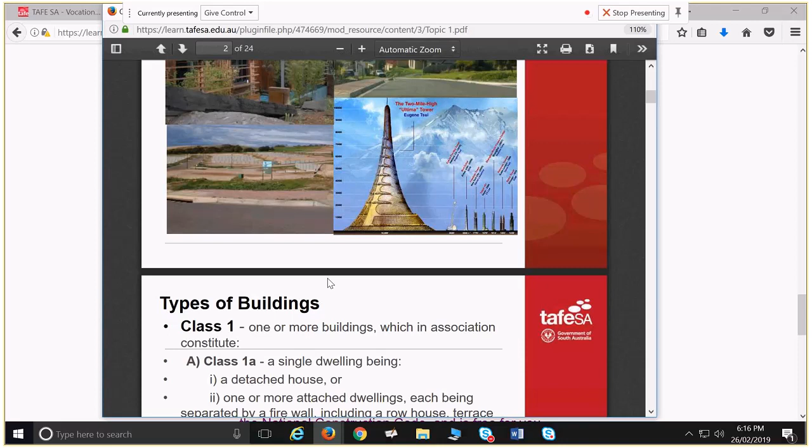So the National Construction Code, there are 3 volumes to it. There's Volume 1, Volume 2, and Volume 3. What we are concerned with in this class is Volume 1 and Volume 2. Volume 3 is for plumbing and electrical, or building services.

And then there's also a Volume 4, which is an explanatory volume. You can have a look at that. It provides commentary on the National Construction Code in, I guess, essentially an easier to read fashion. But our main reference is going to be Volume 1 and Volume 2.

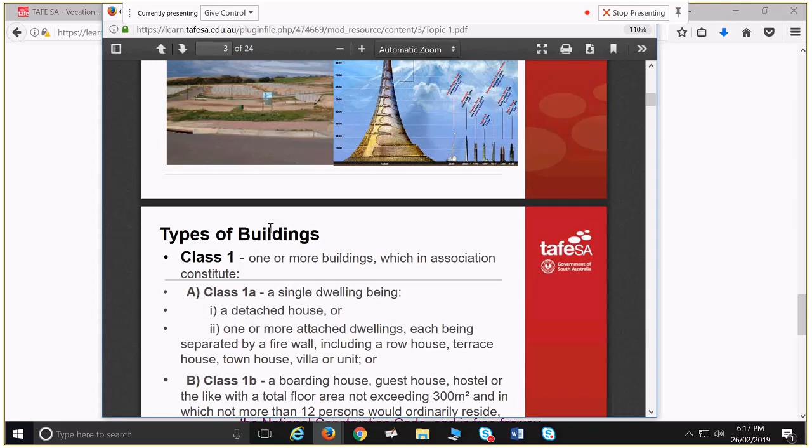Those 2 volumes, within the National Construction Code, classify buildings into different classifications. So you have Class 1 buildings, which are your residential buildings, so a single dwelling being a detached house, or one or more attached dwellings, each being separated by a firewall.

So I think we digressed a little bit last week into what is a firewall. That fire separation wall is a wall that will maintain fire separation for 90 minutes in the case of a Class 1 building. So it won't fall down for 90 minutes, it won't let the passage of flame and hot gas through it for 90 minutes, it won't heat up on the other side for 90 minutes.

So if we have, maybe let's say these are a series of row houses, between those series of row houses, if we had a fire separation wall, they become a Class 1 building. And then we can get separate title and sell those off separately, if the council allows for the creation and subdivision of separate titles, etc.

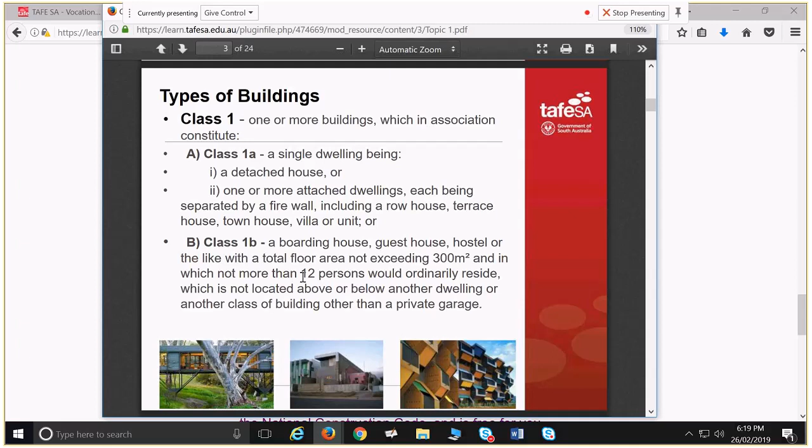So that's Class 1A. You also have Class 1B, which is a boarding house, a small boarding house, with a maximum area of 300 square metres, where no more than 12 people would normally reside. So they both come under Class 1.

Class 1, and then you've got class 10, which are non-habitable buildings or structures, things such as private garage, carport, shed, or the like. Typically, class 1 and class 10 buildings are built together. You build a house, you may build a garage on the site, or a studio, or a swimming pool, or a retaining wall, or a non-habitable structure.

Because these two things are normally built together, they are bundled together in the Volume 2 National Construction Code. So I'll write that on the board as well to keep it clear. So we've got Volume 1 and then Volume 2. Under Volume 2 we've got Class 1 and 10. Under Volume 1 of the NCC, we've got Class 2, 3, 4, 5, 6, 7, 8, and 9.

So Volume 1 covers commercial. These are commercial classifications. Volume 2 covers predominantly residential classifications. So Class 1 and Class 10.

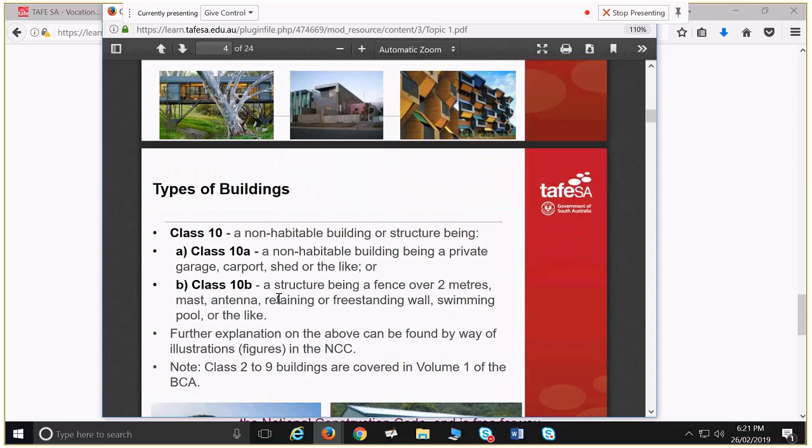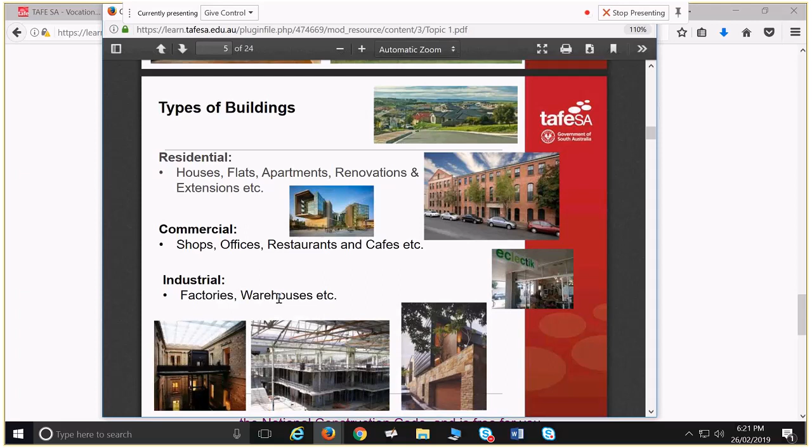So class 1, houses, townhouses. Class 2, well, that says flats. That I'm not sure if that says flats now in the new National Construction Code. That's a bit of a definitional thing.

Typically, when people refer to a block of flats, they're referring to buildings that don't have fire separating walls and don't have separate titles. When you create fire separating walls and separate titles, you can then call them units and apartments, because they can be sold off separately.

So that's just a little definitional thing. But class 2, basically that's multi-residential, where you've got a whole bunch of residences all joined together within the one building. And an important part of that definition is you have residences on top of other residences. So that means it's not only about fire separation walls, but fire compartmentalisation with your ceilings as well. So that ceiling has to reach 90, 90, 90, or in some cases, when it's a larger development, it's 180, 180, 180 - for 180 minutes, resist the passage of fire in certain tests.

And I mentioned boarding houses coming under class 1 for 12 occupants or less. If we've got more than 12 occupants, then we have to go into this classification, which is class 3, which also includes hotels, motels, etc. So your larger accommodation where you've got people that don't necessarily know each other.

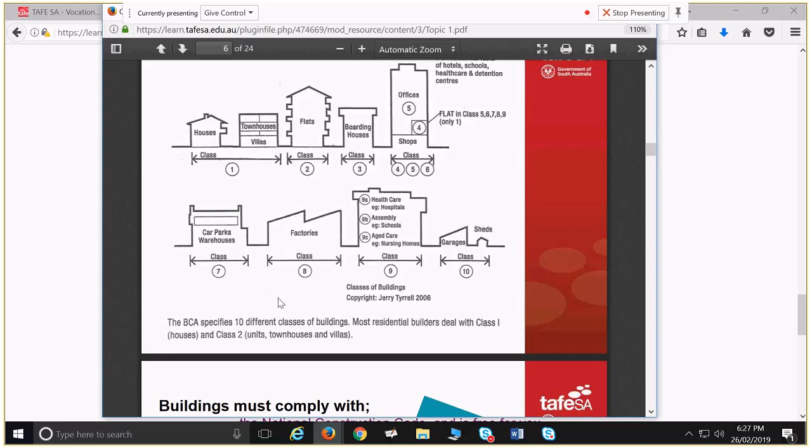So all the buildings, the council has a say in what we can do and what we can build. First of all, we have acts of parliament. So it's not just the federal government. In Australia we have several tiers of government. We've got federal government, which is all of Australia. We have state government, which is all your various different states, and then we have local government.

Within South Australia, so we've got our South Australian government. They will pass various different acts, and some of those acts relate to what we do as a profession. One of them is the Building Work Contractors Act, which tells you how you can operate as a building work contractor, etc. The other one is the Planning Act. So that Planning Act sets out the parameters in which local councils can impose a zoning, and they can impose that zoning on various different parcels of land to say you can do this or you can do that on this parcel of land.

And they do that via their development plans. So each separate council has a separate development plan. There's a lot of commonality between the development plans. Like if I pick up the development plan for Charles Sturt and the development plan for Mitcham, probably a lot of the stuff is the same, except for some of the different councils will have specific aspects that relate only to them. Like Adelaide Hills Council, they worry about contamination of water sources that come down through the hills. They worry about bushfire. They worry about houses that can be seen from the Adelaide Plain that are sticking out from the hill, etc.

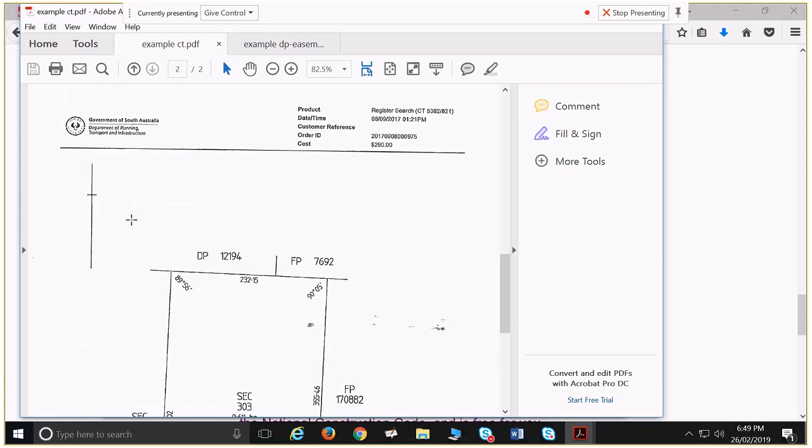So we've got all the information on that first page of the certificate of title. It tells us who owns it, who has interest in it, what parcel of land it is, etc. Then on the second page of your title, you typically have your survey plan image.

Just like when we provide information to the council about what we want to build, we'll provide them with plans - these are the floor plans, these are the elevations, etc - and then we'll also have a document, the specification, where it's all written. Same as with the title, you've got written information, and then you've got diagrammatic information, because there's some information that you can convey so much better in diagrammatic form than in written form, and that is things like property boundaries.

So we can say that angle there is 89 degrees and 56 minutes, that one there is 90 degrees and 5 minutes, and the distance between them is 232 metres, 150 millimetres. So that sets out exactly where the boundaries are.

So the surveyor can get that, look at it and go, okay, well, we're going to do our survey from this registered survey point up there, get the location of that little piece, that little corner there, and then they work out exactly where everything else is in relation to that. So that can be read by the surveyor.

But also, as a drafter, when you have to go drawing up a site plan, that's where you get your site plan from. So you get that, scale it up in AutoCAD or Revit, import it, scale it up, and then just draw directly off of it. Or you can go, all right, start here and draw 452 metres and 20 millimetres up that way, and then draw a line 89 degrees 56 minutes from there, and so you can draw your site plan accurately from that information.

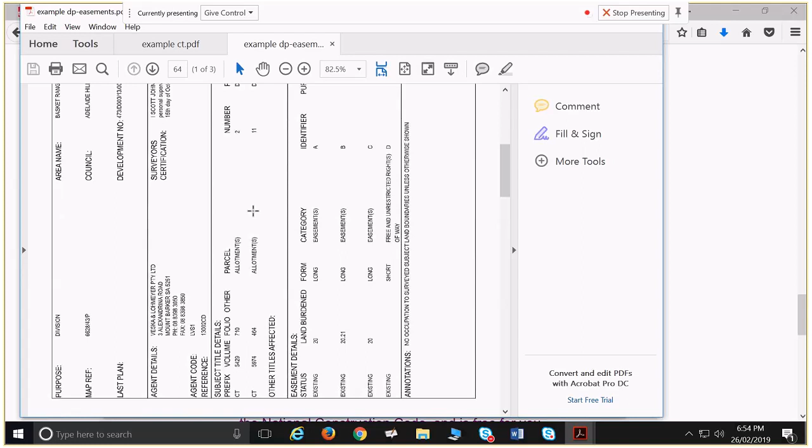So typically, you have a survey plan image to show the location of all of these things. You have a document which summarises them, and then you have further documents attached specific to each one of those, saying this is the person who owns that easement. So you have something like a survey plan image, like that larger one, and then a more detailed survey plan image that shows things in even more detail.

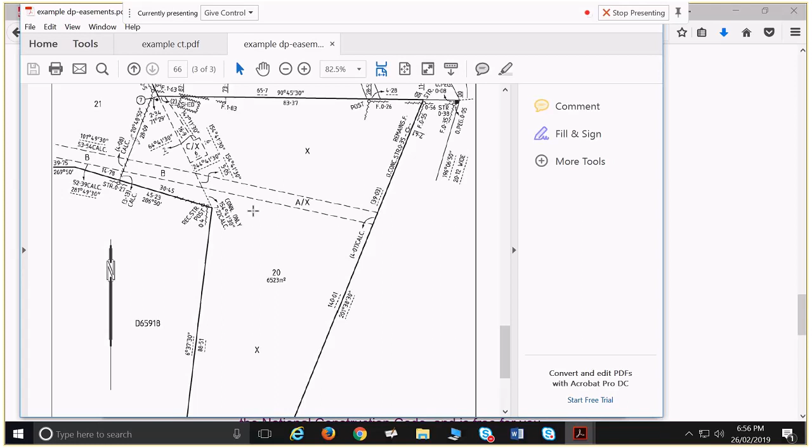They also show things like this - a bit of corrugated iron. It says that shed is actually encroaching on that other property. So some things got a little bit out of whack at some point in time when they were doing fences and sheds and whatnot. So there's all that information shown in detail, and then we've also got our detailed directions - all of our angles for the allotment there, like that. So that's one that's a bit messy. You won't often see them that messy.

So if there's a building that's built wrong, I understand this has happened in America before. Not this building, but yeah - a building which is built on someone else's boundaries, and then they charge you rent for that.

Oh, I don't know actually, I don't know any cases of people charging rent for it. Typically, what happens is there's a realignment of boundaries, and you have to pay for a surveyor to come out and do the survey for the realignment. That might cost you about $5,000 to do it. It's not a cheap exercise when it comes to something that might go to court, because surveyors go, all right, we can go out and do our job, but if we have to stand up in court to defend that, we want to be paid more.

So for significant disputes, it will typically be a realignment of boundaries, and this will get changed, and you may even have a new title issued. So rather than have your old title reference, you get a new title issued that shows this boundary cutting across here to enable that house which was built on the wrong bit - that realignment of boundaries.

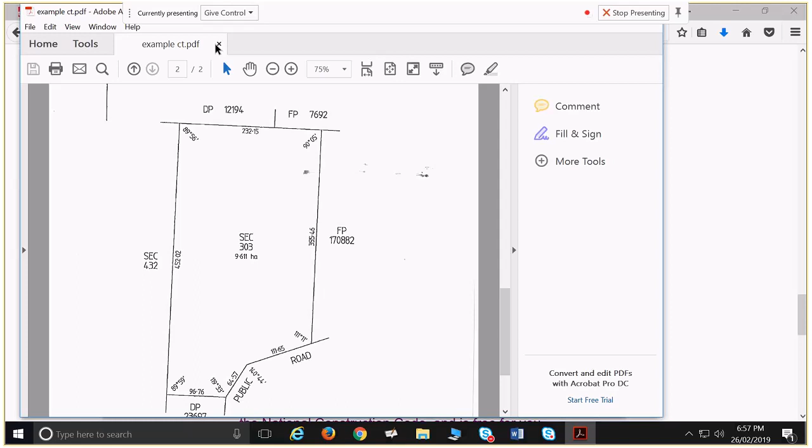With that other one we just saw, where there was a shed encroaching on that block, typically you wouldn't worry about it, but it costs you less than $5,000 to build a new shed. Just knock the old one down, build a new one if the neighbours have an issue with it. So it comes down to that negotiation with neighbours and often a realignment of boundaries.

So we've covered the National Construction Code. Previously it was called the BCA, so if you hear people talking about the BCA, that's what they're talking about. BCA and National Construction Code are not the same - BCA was what came before it. BCA was still a national document, but then you had different state-based housing codes, like the South Australian Housing Code. That was all later incorporated into the National Construction Code.

But having said that, there are still state-based things, and I'll get into that in a minute.

So the Development Act is an Act of Parliament that spawns the development regulations. I think it's the Development Act of 1996, which brought about the development regulations of 1998 or so. Those are the current development regulations by which we have to do anything.

They give council the authority to impose their zoning and require that you get council approval to do anything. That is all about to change. We've got a new Development Act, the 2016 Development Act, which is in the process of forming new development regulations, intended to be implemented in 2020 - that's next year. I don't know much about the changes within that, but I do have an idea, as do others.

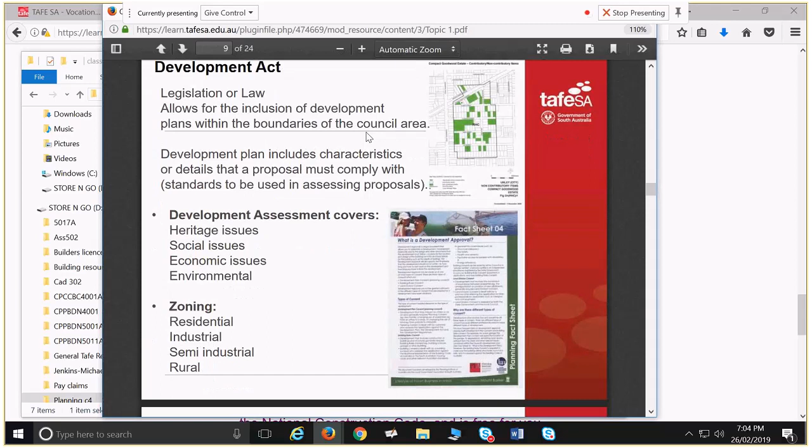So National Construction Code deals with things such as structural sufficiency—is it going to stand up? Fire safety—if there's a fire, is everybody going to get out okay? Health and amenity—if we're living in that building, is that going to be detrimental to our health?

Ways in which buildings can be detrimental to our health include mould growth from condensation, and inadequate light and ventilation, which also causes mould growth, but also it won't be a very nice place to live. That's about it—that's controlled by the NCC.

Access and egress—that's things like stairs. You can't build a staircase which is this steep. You can build a ladder which is that steep, which is a way of getting around some of these things, but for staircases there are rules around that. There's minimum widths of doors for required exits in emergency situations.

Let's say we had a fire at the TAFE here, we wouldn't want to have to be going down a really tiny corridor trying to squeeze everybody down there. It would be disastrous. So there's some dimensional things around access and egress, and energy efficiency, which is to ensure that buildings are not built which just use lots of energy.

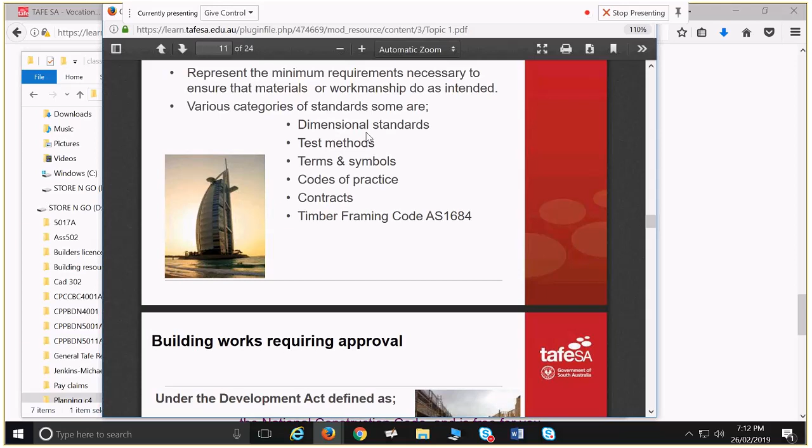We've also got, say, an Australian standard for carpet, saying carpet has to be a certain way. Or Australian standards for paints and internal finishes, for the manufacture of plasterboard, and for glass, AS 1288, which says how a piece of glass has to be manufactured and what defects it can or can't include.

Whenever we do anything, typically we need approval. Some building activities are exempt, as the development regulations set out buildings of a certain size or nature, under a particular value, that don't need approval. Then your individual councils can say, this one does need approval — so what the council says goes on top of the development regulations.

You can debate that with councils, but typically a small garden shed won't need development approval. New construction of a house, demolition or removal requires approval. Excavation or filling incidental to construction or demolition also requires approval.

If we're just digging a small hole, that's not going to require approval. A lot of councils have information sheets saying what doesn't require approval in their area — for example, removal of 8 cubic metres of soil won't require approval, or some similar volume. But typically, if you're digging a big hole, council wants to know about it.

Or if you're cutting a road in and will have runoff from that, or cutting a road in from a road reserve onto your property, council definitely wants to know about that, and you shouldn't do it without council approval.

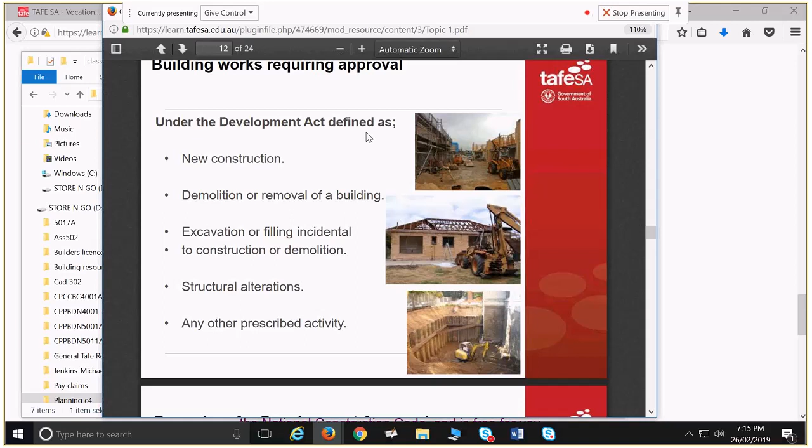So for many instances, it pays to follow the letter of the law. And then in the development regulations, they've got this funny bit that says any other prescribed activity, just to cover all bases, to make sure council can tell you what to do about what they call any other prescribed activity.

So for development approval, you lodge an application to council. The approval consists of planning consent and building rules consent. Planning consent goes to the council currently. Building rules consent can go through the council or through your private certifier, whichever you choose.

Planning consent is assessed against the development plan, so your zoning and what it says in there. The development plan consists of council-wide objectives. So let's say Marion Council will say we are a flat piece of land with some shops and things like that. They'll have a general picture for the council and say we want residential development to be this, we want industrial to be this, etc.

So you have council-wide objectives and then you have your zone-specific objectives. So you have residential zones, and then you have residential 1A, for example, which will say residential 1A will allow detached dwellings with an allotment frontage of no less than 10 metres, things like that.

Or then they might change the zoning. So you might have been residential 2, which says you have to have an allotment frontage of no less than 30 metres. Then they change your zoning to residential 1A, which says you can have an allotment frontage of 10 metres. And then all of a sudden developers come in, buying up everything around the place, knocking everything down and chopping it up into 10 metre frontage houses.

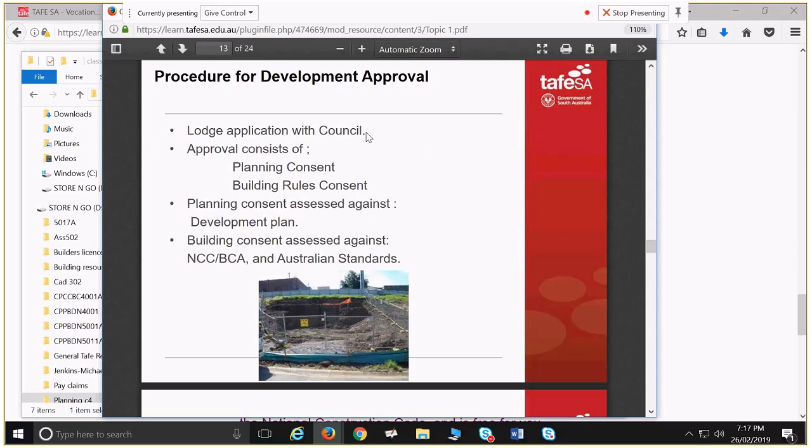And then that's your planning consent, and then your building consent is assessed against the National Construction Code and Australian standards.

For getting any of that approval, you have to supply documentation. So you supply plans and specifications to the council. And that's what you guys are pretty much, I think, here for, is learning how to do all of that - get that stuff packaged to council to get it through.

That's going to be the bulk of your work as drafters, and particularly this bit is going to be the bulk of your work as drafters - producing those plans that have all the information on it to say this is how the building is going to be built, and this is why it complies with all the Australian standards and National Construction Code.

But with your plans, you also supply a specification. So you have diagrammatic representation of the building, and then you have written representation of the building. The reason we have written representation as well is because on our floor plans, we don't want to say carpet, plush pile, grey colour with a mottled pattern, eggshell white walls, matte finish, Dulux, blah, blah, blah. We want all of that stuff separate, because if we include all that information on our plans they'll just be covered with text, and it'll be very difficult to read.

So some things you do need to show on plans. All the distances, everything that's essentially measurable is really good to show on a plan. So how large the door is, how large the windows are, how high the ceiling is - well, that's drawn in the section. But everything that's happening in a horizontal sense is drawn on a plan. Everything that's happening in a vertical sense is shown in either an elevation or a section.

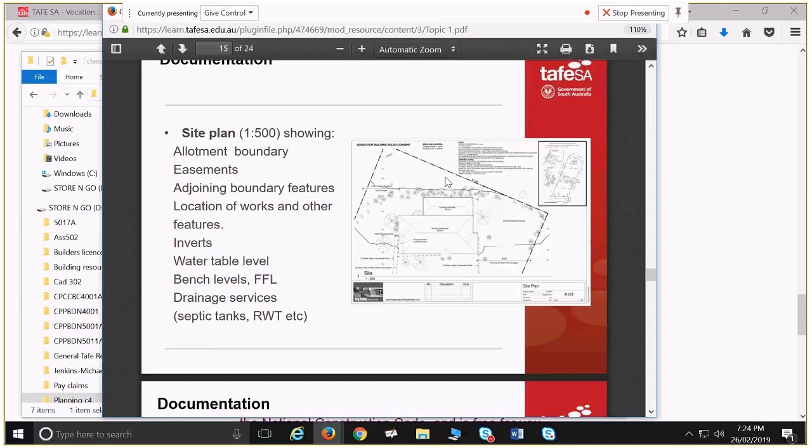So site plans - all this stuff you're going to be hopefully incredibly familiar with in a year or so. For planning approval, you need to put in a site plan, probably a locality plan, floor plan, and elevations as a minimum. They might ask for other things as well, like if you're doing stuff in prominent locations. They did something on Melbourne Street where they wanted a mocked-up visual of exactly what it would look like in that location. It really all depends on the area you're working in.

But yeah, that site plan's got to show things like easements, so they want to know where a power line is going through, because if you don't show easements on there, the council might check the title.

That's another thing you include with your application. Council might check the title, but if you don't draw on your site plan where an easement is, they don't necessarily know that you're building on that easement. Certainly SA Power Networks have no idea because nobody sent them anything. So you need to include all your easements on your site plan.

You need to show adjoining boundary features. So if you've got a neighbouring building built right on the boundary, council wants to know about that - one, for fire separation. You don't want to be within 900 millimetres of that, or if you are, you need non-combustible materials or that sort of thing.

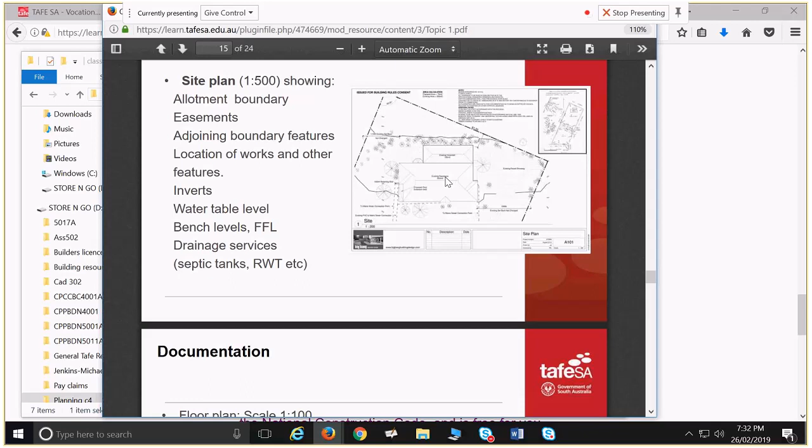But quite often what ends up happening is people build a detention and retention tank. Retention is water you retain for your own use, and detention is water you detain for a certain period of time, a couple of hours. So it's a tank with an outlet - this tiny one has a big outlet for use around the garden, that bit stays full all the time. In a rainfall event, this other bit fills up and trickles out slowly. Councils are stipulating that in certain areas as well.

So that's site plans and floor plans. A site plan is going to be either 1:500 for large blocks or 1:200 for smaller blocks. Floor plans are typically going to be a scale of 1:100. What we definitely don't do is just make up our own scales - we don't go 'oh well, 1:333 fits really nicely on the page.' The reason we don't do that is because sometimes builders, council inspectors or somebody has to scale off the plans using a scale rule for various different things.

Also, people get used to scales, used to plans in a certain scale. So you look at it and go, oh yeah, that's a 2100 high window, 1800 wide - in 1:100 you end up being able to just tell what that is. If we make up scales like 1:250, you can still scale it off because it's easy maths, but it's harder to just look at it and know. So we have standardised scales, and councils say that on their websites - they want locality plans at 1:500 or 1:200, floor plans at 1:100 or 1:50, sections at 1:50, details at 1:20, 1:10, 1:5. They stipulate that on their websites.

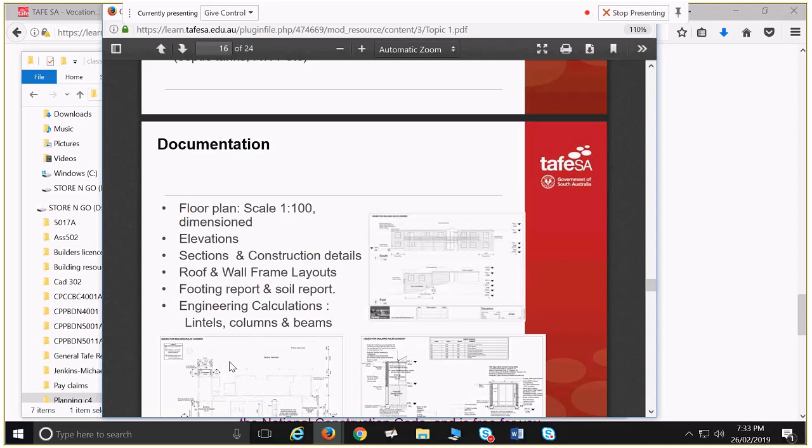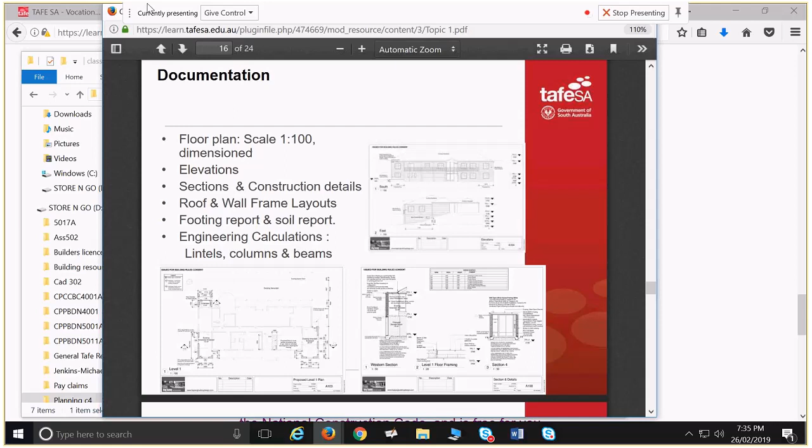Floor plans are drawn as if you're chopping through the building at 1 metre height from the ground and looking down on it, so anything within that 1 metre you show on your floor plan. Sections are as if you're slicing through the building in a sideways fashion. And specification is all your detailed stuff like carpets, floor finishes, things like that.

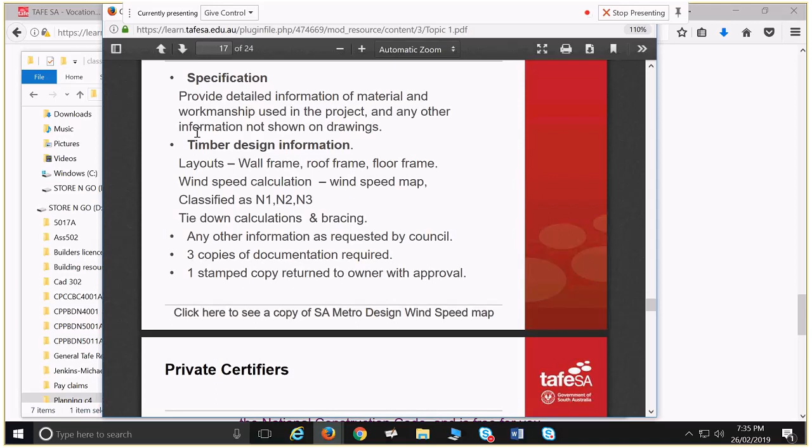So private certifiers - we talked about private certifiers before. After you've got approval and start works, you still have to notify council along the way; the involvement doesn't stop at that point. They want to know when you're going to start digging, and they want to know before you pour concrete in your footings.

So you dig holes, put in a plastic membrane to stop moisture coming through, and then put steel inside. The size and spacing of that steel determines how strong the slab is. Council wants to see that you've put the right steel in there, and the engineer wants to see it too, before you cover it with concrete - because once it's covered, nobody knows what's in there. They'll also have to be notified at roof framing stage. Do they actually have to come out to site, or can you just take pictures?

All you have to do is notify them. Give them one day's notice to say we've got stuff in place, at 7 o'clock tomorrow or the next day, whatever, we'll be pouring concrete. It's up to you to come out. That's all you have to do, is notify them, and it's up to them.

Look, it really doesn't happen a lot that council comes out. Sad fact. That might change after things like Opal Tower in Sydney, where so much stuff was done with little regard to actual correct practices. Things like that might change a bit, and people from council might start visiting sites again.

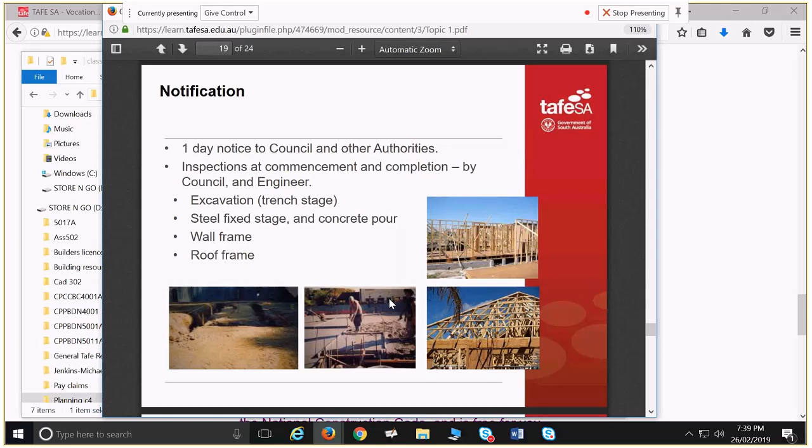Did they have any cases where the steel's too far out and then rusts? Well, it's only about 4 or 5 months old, this building, so it's not rusting yet. A really interesting thing — if you look at the floors through here, there were some sections that were cast too high, so they cut them down, and you can see the steel work just under the surface if you look. But that is a major issue, because for steel work you need 25 millimeters minimum coverage internally, and for anything external, 40 millimeters minimum coverage. If you don't have that, as you were saying, it rusts, and when it rusts, it pops the concrete away from it — you no longer have that bond between steel and concrete.

If council members come out and they see a lot of dirt on the road, do they get gripey about that, like where cars drive through and traipse mud? Because I actually had an issue with that.

Yeah, so it's the EPA that worry about that, but council will do the EPA's work for them, for sure, because the EPA can't be everywhere — they're not going to be scooting around checking everything. They want to ensure that you have dust and sediment control in place. Dust control is about having shade cloth on your fence around the site to stop dust blowing out. Sediment control is about ensuring you don't get four-wheel drives taking lots of mud out onto the road, or if you do, that you have little bunds placed around the culverts, or where the water goes into the drains, to catch all of that sediment.

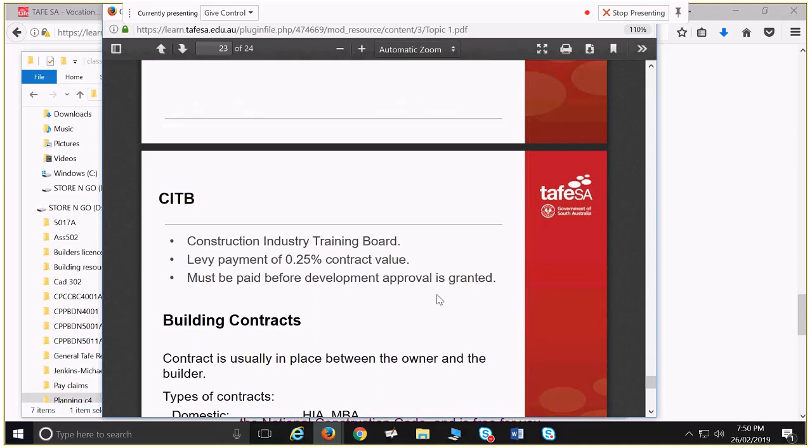And if you're contracting for doing that, you're not going to write up your own contract, you shouldn't. You're not going to make these things up. You typically get a standard form contract from HIA or Master Builders. So a lot of builders are members of either or both, because there's a lot of other services they provide, but one of the services they provide are standard form contracts, which will include everything that you want to be contracting for.

If you're doing commercial work, you're going to have somebody draft a commercial contract or use a pro forma and modify that, because within commercial work there's a whole lot more variation. For residential, we can say this is what they're going to be doing, within the bounds of that. When you get into commercial, it's far more each to their own scenario. So that's the legislation and so on that controls what we do on a site.

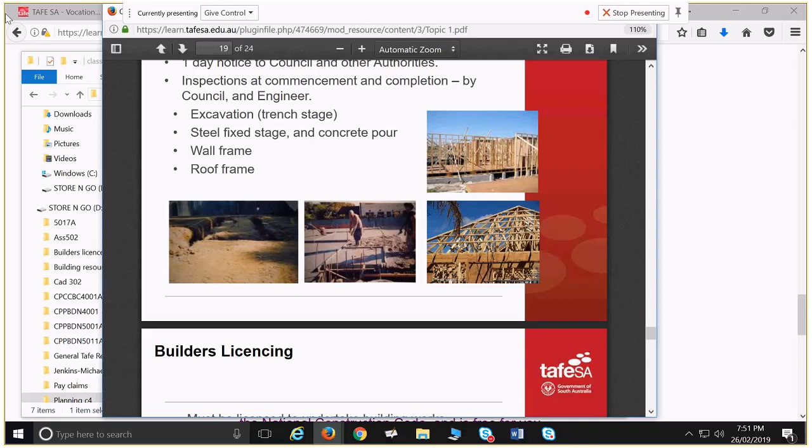It's not just the legislation, it's all those people and bodies that will control what we do on a site.

The next thing for you to consider is what drives the design. There's one for you, Toby - it's House Over a Creek. I reckon that's Max - that was Max Pritchard, the architect for that. So does everybody know Max Pritchard, or know of him?

I feel like I've heard the last name. Max is retired now - there's Pritchard Gunner, so you'll see Pritchard Gunner Architects, and then Pritchard Building something or other, that's his son who's taken that over. But Max is the father. He's done so much around SA. I used to go installing water tanks and so on, and I'd just be rocking up at Max Pritchard places all the time. He's very prolific, but also very successful - he would get a lot of stuff through council.

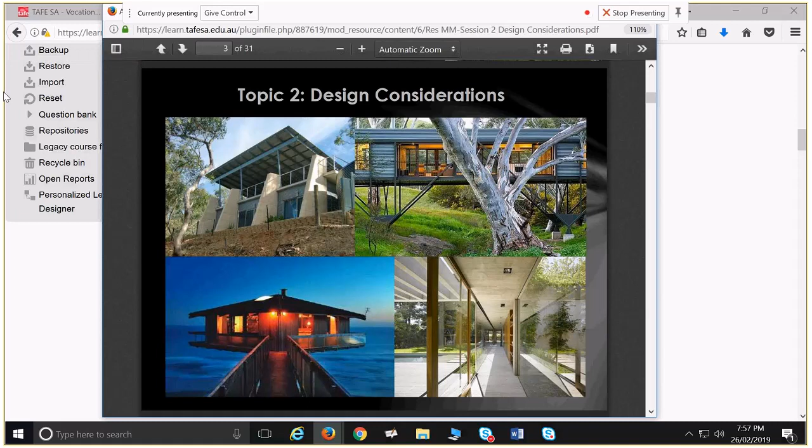So as a draft, obviously the architect would come up with the overall shell of what the building should look like, but then does that fall onto us to say, alright, well, this is a house in the Adelaide Hills where there's gum trees all around, then we need to use that sort of product that has this colour to it, so it doesn't look odd. Is that where we make that decision, or is that all the architect?

It really depends on who you're working for. So if you're working in a large firm, you typically get pigeonholed into being a CAD monkey, where you're just doing drawings, and you might just draw up sections. You might be the person doing plans and elevations, and then someone else is doing structural modifications and so on. So for big firms, you get pigeonholed a little bit more.

If you're working for a very small firm, for a single architect, they'll go, oh okay, Toby knows a bit about this sort of stuff, I'll get him to do that. But then as your experience and knowledge grows, they go, well, I'm charging out at $200 an hour as an architect, we're charging him out at $80 an hour, let's give him lots of work.

But then also you're in that position of going, well, I know this stuff, but how about I charge you $120? So you increase your value as a drafter by knowing more, and so you both become far more employable, or you have that negotiating power to negotiate a higher rate if you know a lot more. It's a very difficult thing to answer because it's always very case specific.

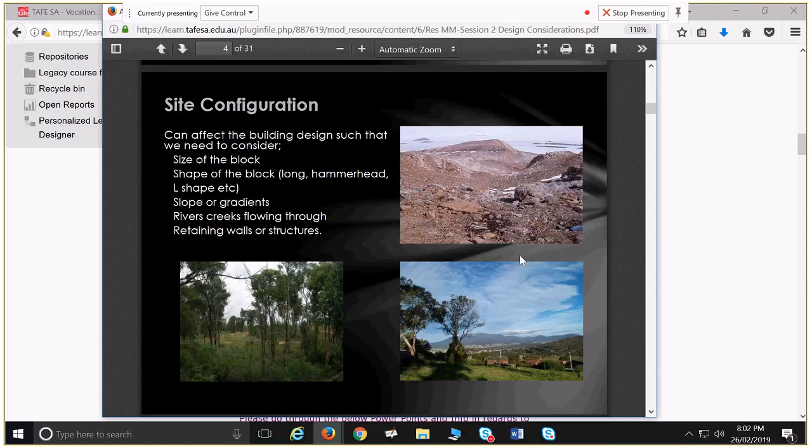You might think, do you want to consider purchasing another allotment to build on? It's like an extinct volcano. Do we have seismic activity? Do we have to design for seismic activity?

Site configuration, the shape of the site, is going to dictate what you do. Access, things like that. So if this is your access, you probably don't want to build in precast concrete panels, because how are you going to get them in there, for starters? So access will mean anything.

Things like that have to be considered. In fact, that's probably the most important thing that drives it, is what's it going to cost to do that.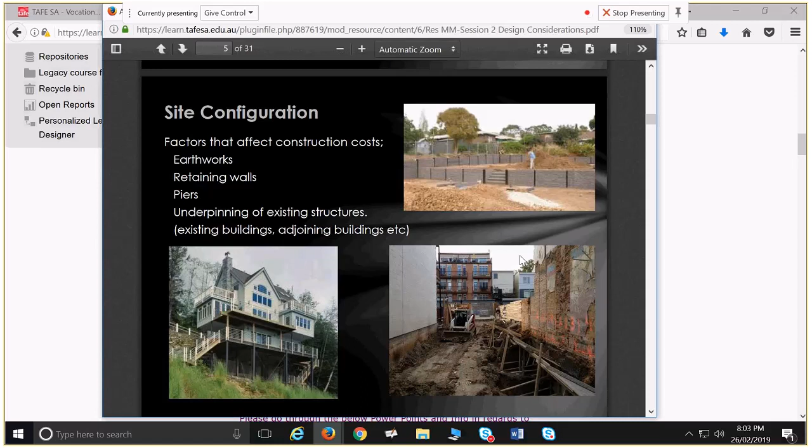Very important, avoid building on the wrong lot. It happens. In fact, it almost happened to me. A place over in Kangaroo Island, bush block, all these bush blocks, no pegs about the place, measured from - initially I got it wrong. I started doing a level survey and it's like, oh no, this is not the right one. So it can be easier than you think to do that.

We know about certificates of title, lot numbers, and so on. So we check all of that. We understand all of that. That's like our checklist. What we didn't mention before are liens.

If there's a financial debt against the property, has there? And that's an important thing, because let's say a child wants to hurry up and get their inheritance before they're actually due. Like, somebody else still owns the property, but that child is saying, oh well, I want grandma's house and we've got to be doing these extensions. They employ you, and you'll want to check the certificate of title and go, hang on, this says Mavis Briggs on here. You're not Mavis Briggs.

You want to check those things, or check that if you're a builder and you've done some building work on a property and that person decides not to pay you, you can lodge a caveat on that certificate of title to stop them selling that piece of land. But also, if that person has employed builders previously and didn't pay them, that caveat's there, and they'll go, oh yeah, can you go do this design work for me? You check the certificate of title, there's an undischarged caveat on there because they haven't paid somebody else. You don't want to touch it with a 10-foot pole.

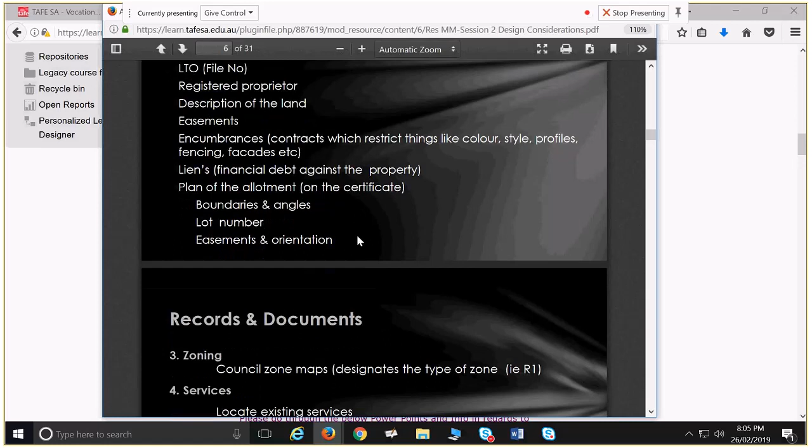Zoning, we know. Services, very important thing. Mentioned before, building next to a creek - you have to meet the SA Health guidelines for on-site wastewater disposal. If you've got a sewer connection, well then you don't. Your sewer connection is SA Water's responsibility. As long as you get it to the sewer, that's fine. You don't need to have a septic system on your site.

Services that are available are going to dictate things. If you've got mains gas, well then you might have instant gas hot water service. If you don't have mains gas, you probably won't have instant gas hot water service or gas cooktop or something like that. Underground power, definitely that's important. So we're working through that at the moment, which is an interesting scenario.

The Murray River, there's a floodline - the 1956 flood level. That's a really good one to bring up. Typically you're not allowed to build anything underneath the 1956 flood level, because that's set as the maximum that has ever been recorded as the height of the flood, and they want to ensure that people don't have their septic tanks down below that, or anything else. So if you have a flood again, fridges and whatever aren't going down the river. That's a really good one.

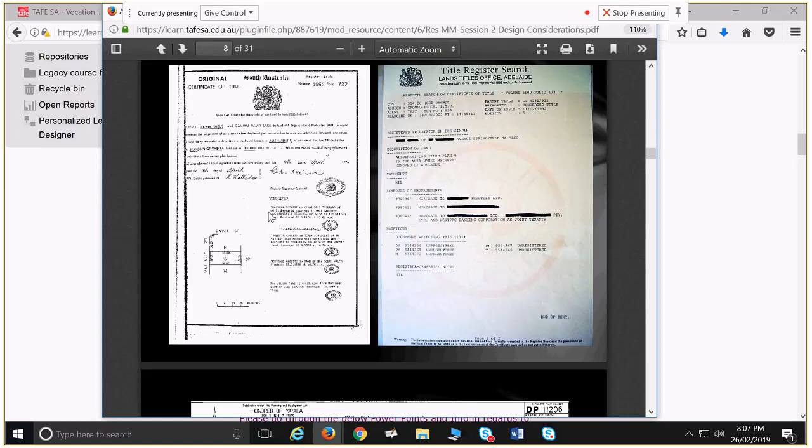So you've got your titles, you're fairly well versed in that. Okay, that's a survey plan image. So that's a detailed development. That's actually probably a bit more of a common sort of survey plan image you get, something like that. And then you get your detailed allotment image like that.

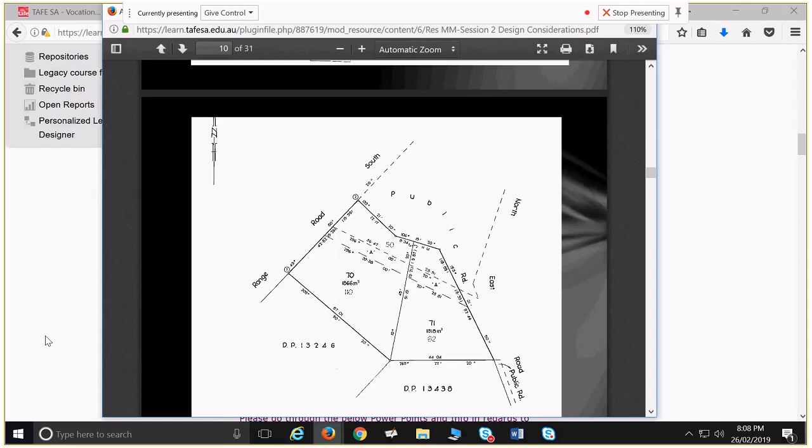So there we go, what's that? It's a road. Well actually, no, that one's an easement. That one specifically, that's an easement for water. So that's up at Houghton. You've got North East Road hitting Range Road South. Up at Houghton there, you've got this massive big concrete water tank on top of the hill and a big pipeline going down from it. So that's what that one's specifically for. But yeah, first glance you'd go, oh, that's an easement for power. It's 6 metres wide or so in a straight direction. It's actually 5.26 metres wide. So yeah, but it's an easement.

So some more survey plan images.

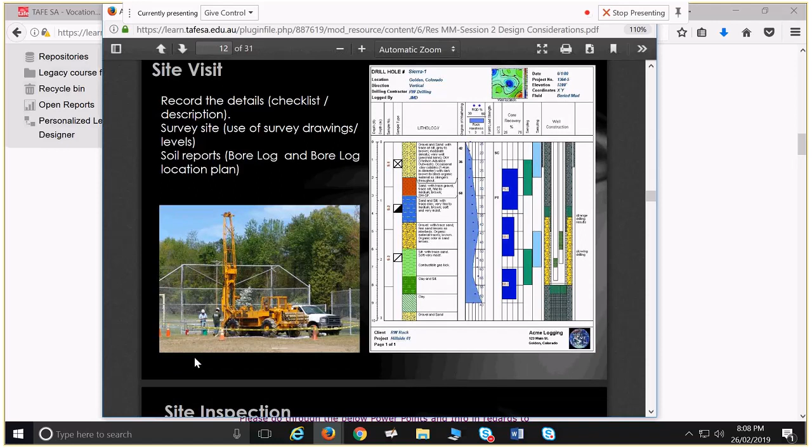Now, another thing that's going to dictate what you can do on a site is what the soil is like. In South Australia we have different types of soils. Predominantly we have reactive soils - soils that if you add moisture, the soil swells. Clay soils, particularly firm clay soils, when you add moisture to them, they have a lot of strength for lifting stuff. There's that capillary action of the water mixing with the clay. It's actually quite a strong action, and it can lift things up.

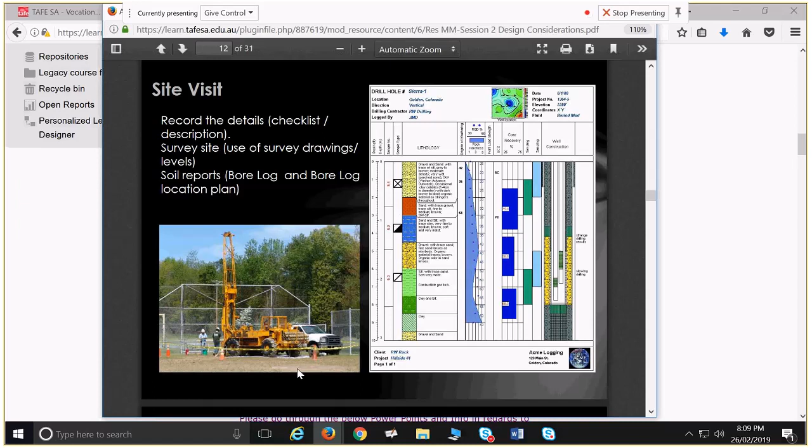Those reactive soils cause a lot of issues. The really bad reactive soils we get are typically around Keswick, Newton, and Rostrevor. So former market garden areas - great stuff for growing things in, but really bad for building. You get massive movements of soil.

I've done a lot of level surveys around houses to work out which bits are being lifted up and why. I think the worst one I've seen is 150 millimetres difference from one side to the other - from this corner to that corner, 2 bricks worth picked up by the soil, but there wasn't much cracking in that house. And yet I've seen others where we've got as little as 50 millimetres of movement - and 50 millimetres is still a lot, right? But severe cracking as a result of that 50 millimetres of movement. The difference is...

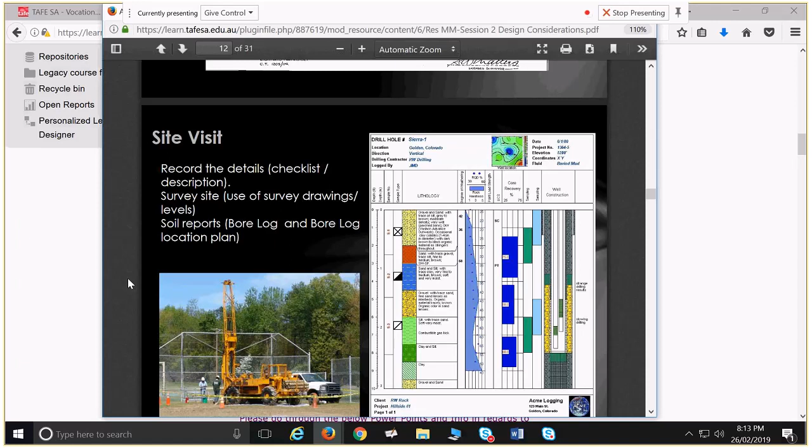Typically it's done with a not such a hardcore machine, just like a Land Cruiser ute with a little push drill on the back. You'll take those soil samples down to approximately 3 metres. The Australian standard sets out that you have to go to a minimum of 3 metres deep, though plenty of engineers like the soil samples to go to 4 metres deep.

In South Australia we have deep-seated reactive soils, which means that some reactivity can be happening even down as far as 4 metres or so.

So you get those soil samples taken, you get an idea of what that soil is, and an engineer does the bore logs. To do those bore logs, they look at those soil samples, take out a piece of it, crush it all up, and go, is it friable, is it prismatic, does it react to moisture, etc. They'll then provide an estimate of how much expansion and contraction that soil will undergo in normal conditions.

So you get an idea of the soil, because that's going to tell you how you can build. Or it's going to tell you how much it's going to cost you to build as well.

Yeah, one fellow I know spent an extra $50,000. Typically your building contract has a $10,000 allowance for footings. He had a $50,000 variation for his footings, so probably $60,000 or so just to build the slab, because there wasn't that consideration at the design stage to go, okay, building on a reactive site, we want something square, something simple, without lots of corners. As soon as you build lots of corners, you've got lots of points for cracking, and you have to go crazy with your footings. The lack of consideration at that early point costs you $50,000, $60,000 further on.

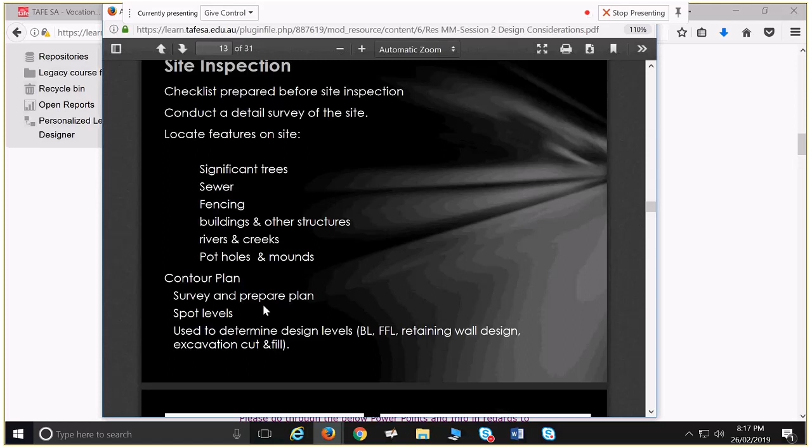You guys are going to learn Revit - there's really cool stuff in Revit. I don't use Revit myself because I'm a bit of a dinosaur, that's more of a newer thing, and the work I used to do, AutoCAD is far better for it. But on Revit you can do a cut and fill plan, and it can assess how much cut you've got, how much fill you've got, how much dirt you're going to have left over that you have to take out and dump elsewhere. There's some really cool features for working out all of that stuff.

That's sort of more your contour plan that you'll be producing. So you take lots of spot levels and then work out your contours from that, or a surveyor might do that for you as well.

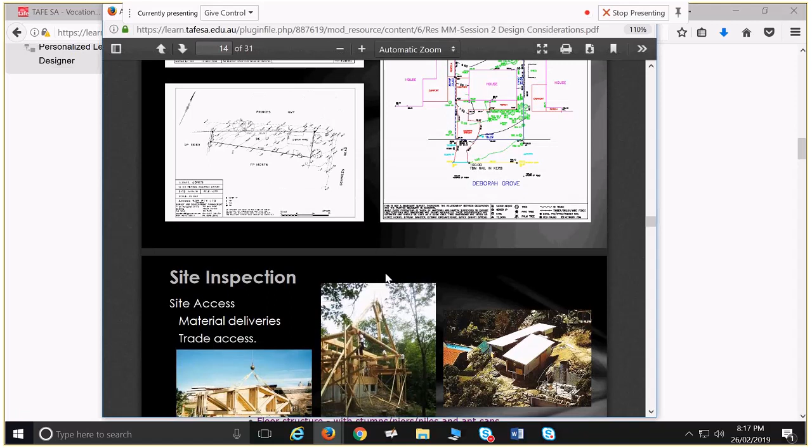If you're building on a slope, and the slopes are harsh enough, don't you have to have a portal with a steel wall frame, which is then engineered? Well, that's a good way of doing it, where you can save some costs.

We'll get into portal frames and elevated floors further on. A portal frame is an autonomous structure in and of itself. We don't have any portal frames here, unfortunately, but portal frames are really good for creating open spaces or for distributing point loads far away from each other, which can be helpful for building on a sloping site.

It really all depends on what your soil is doing. This is a typical way of building on a sloping site, where you have adjustable steel piers going down. It's not the favourite way of dealing with a reactive site, but the best way is to have a raft slab.

A raft slab is something that's going to carry the whole building element. But what you can also do, if you're building on steel adjustable piers on a really reactive site with a lot of moisture, is use an auger and cut a hole into the ground, fill it with concrete with a reinforcing cage inside, make it 3 metres deep, and use builder's plastic to sleeve the hole before pouring the concrete, so your concrete locks into the soil down there, where you're not going to get soil movement.

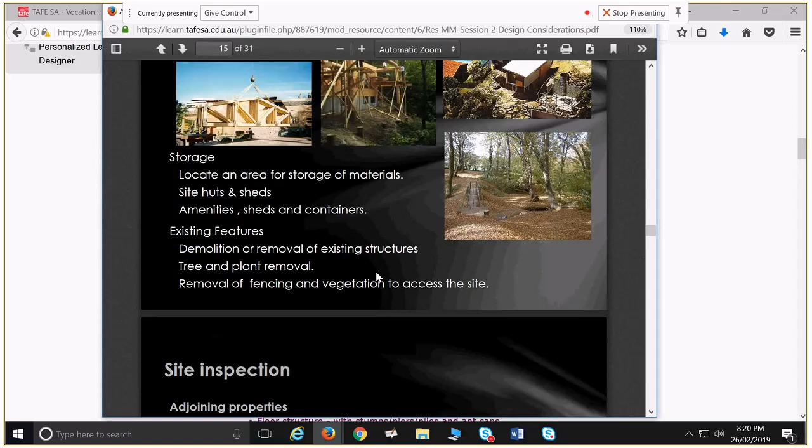That might go down past the soil into bedrock or something like that. Exactly. Your soil samples are going to give you all of that information. Do I have some bore logs? No.

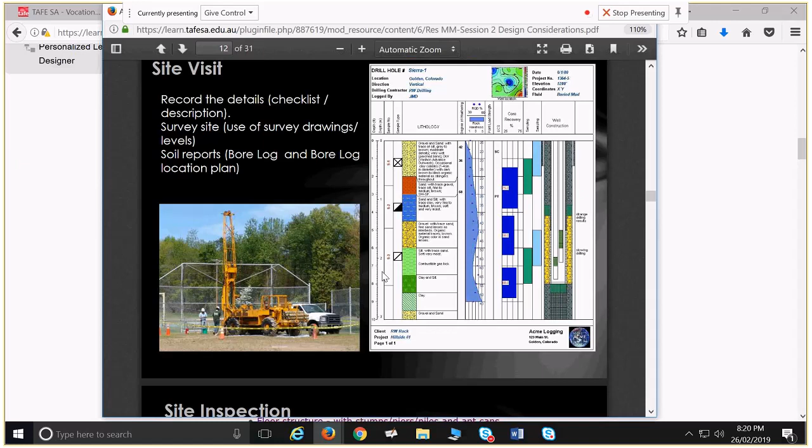It's not very good examples, but typically your bore logs are shown as a table. Within that table it will say soil horizon: this horizon A is 400 mil deep, horizon B is 2000, so 2 metres deep, for example. You'll have horizon A as humus, soil with lots of organic matter in it.

If you're building a raft slab, that humus layer has to go. The next horizon, B, might be hard clay, highly reactive, with Ys values meaning the ability to expand and contract at 100 millimetres, so extremely reactive. Under that you might have weathered rock. So you look at that bore log and decide we need piers at 2.5 metres deep, so the base of our pier locks into that weathered rock, and the soil above it can do whatever it wants.

But if your bore logs show really reactive soil down to 4.5 metres or so, to the end of the borehole, you might want to go further, or think about another approach to building. You go down to rock, down to weathered rock.

You don't really go down to sand, because if you're putting a lot of load on a small surface area, like a 300 mil diameter pier, you want a lot of bearing capacity at the bottom. So you're not going to go into sand or loam, things like that. You want something with at least 100 kPa - though it's up to an engineer to say what pressure it needs to take.

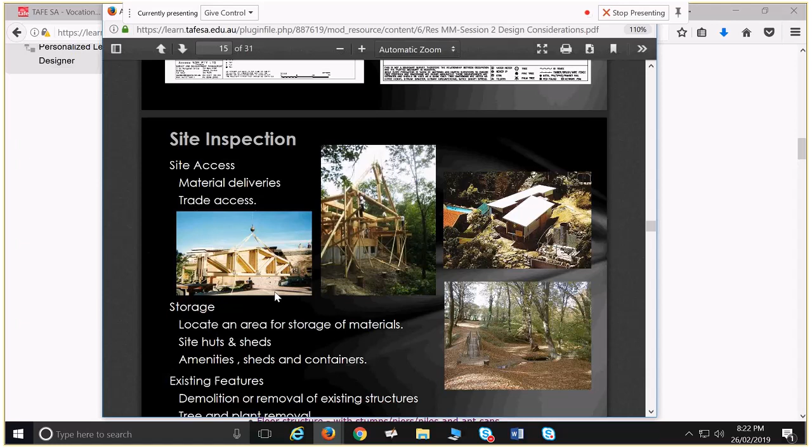You also need to think about site access, material deliveries, trade access, etc. You've probably seen crazy stuff on Grand Designs where people are carrying materials up through whatever. It's not the best scenario, unless that's the only scenario.

Think about storage - where materials are going to go and how you'll get stuff to places. Concrete pumps are awesome; it means you join lots of pipes together and put concrete up there, even though you can only get a truck to one spot. There are plenty of solutions like that.

Think about existing features, what you need to demolish. Demolition is expensive - you can't just think that'll cost nothing. Typically you're spending $10,000 to $15,000 on demolition.

People I know recently demolished a place and when it got to the bathroom, underneath there was all this asbestos in the soil. Demolition can be incredibly expensive when you hit things like that, because you've got to cut off all that soil and pay for secure dumping of it. Very important consideration - demolition can be very expensive. Tree removal can be very expensive as well.

We had that issue with asbestos when me and my boss were redoing a roof, pulling off all the old iron off this 30s building and putting a new roof on, extending it out to a veranda. We got most of the roof off, and then right on the top corner there was a pipe with a heat wrap that was asbestos - apparently that's the worst stuff. So even as builders, we're not really looking to move that.

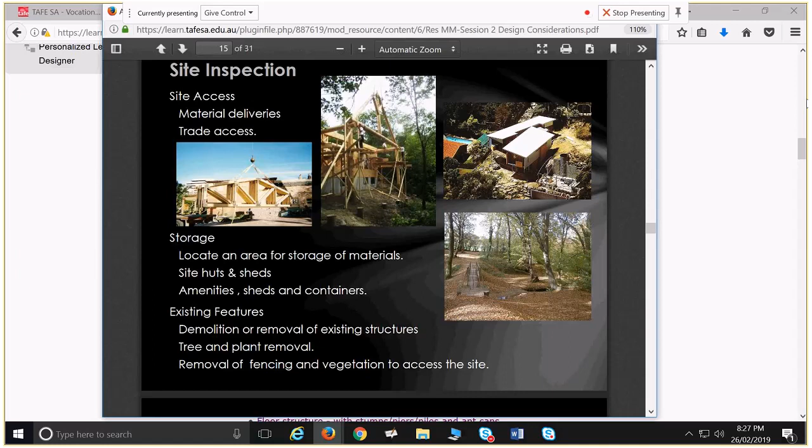For proper disposal of asbestos, look on Safe Work SA - they have guidelines on asbestos removal. If you're going to be removing asbestos, probably best protocol is to refer to the Safe Work SA website. In fact, you could even download all their fact sheets and guidelines and put them in your filing system, so you've got all your site safety stuff there. They provide guidelines on asbestos removal, how that should be done, but wetting it down is important.

For adjoining properties, typically you have to see what's adjoining. Sometimes you're going to want to get a dilapidation report done. A dilapidation report records for adjoining buildings any problems they already have, because what you want to avoid is building on your allotment, using a pile driver or something like that, creating lots of vibration, and the neighbours say you've destroyed their house - that all this cracking has just happened since you've done that work.

If you don't have a dilapidation report in place, it's your word against theirs. Whereas typically you employ somebody - you can do it yourself, but typically employ somebody else - to go around and record every little bit of cracking, like a crack in the curb, anything like that, and document it with photographs, producing a report on the condition of the neighbouring property before you did any work. Then you're covered, because you can say the problem isn't a result of our work, it's a result of a pre-existing condition.

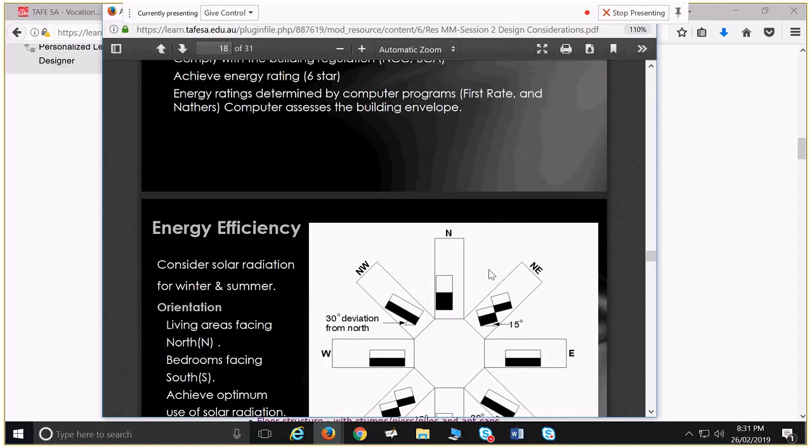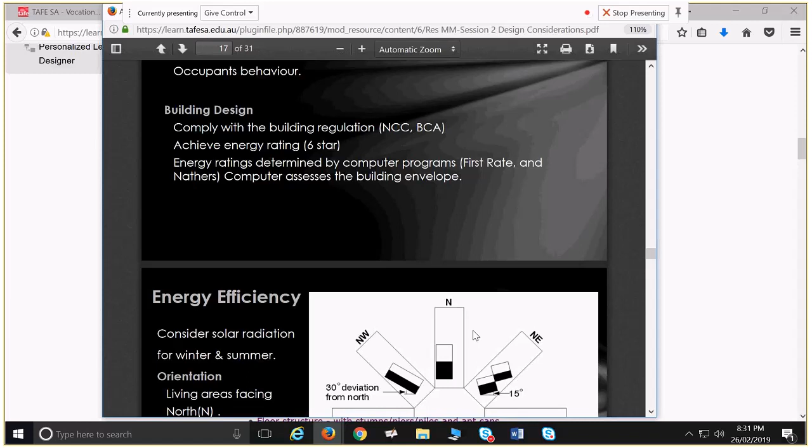Yeah, something I'm very interested in is design for climate zone. If we can go into that more further on, if you guys are interested in that or not, yes. Yeah, well, I'd love to go into that a little bit more at a later date as well. So that's sort of where we're at now. Look, I'll pick up from there next week. We do really have to start getting into the footing systems and things like that next week, but yeah, I'll cover this stuff next week.

How many documents? Well, I think the ones you opened up probably had less in them. Like I had some of the interior painting, I had 7 or 8 products. How many product things in each folder do I need? That doesn't matter. All I need to see is that you can logically organise these things.

So I'm telling you, produce this library of design guides because you'll need it, because you want it, right? That's super important stuff, and it's also really important to be able to organise and to learn the ability to organise that stuff really well. That's more for your benefit. Simply in terms of the assessment, I have to see that you're able to organise things and update things.

So you get stuff in there today, and then throughout the course you update that and you add more things to it. That's the 2 essential things I have to check. So yeah, no requirements about numbers and stuff. That's all down to you.